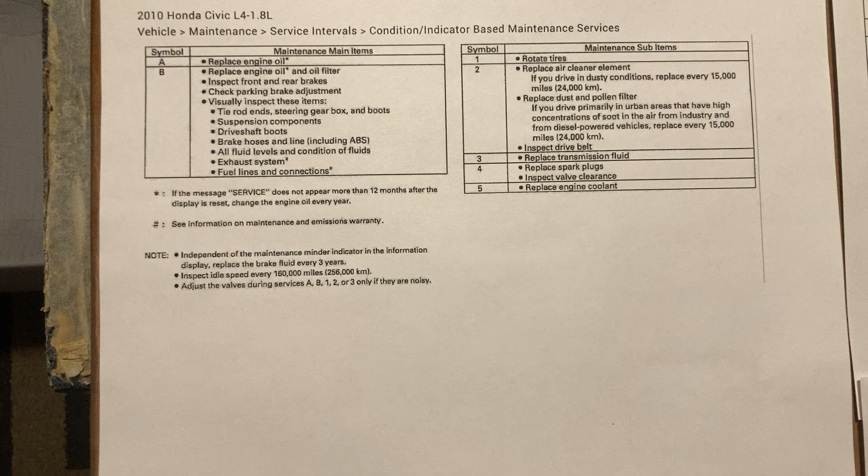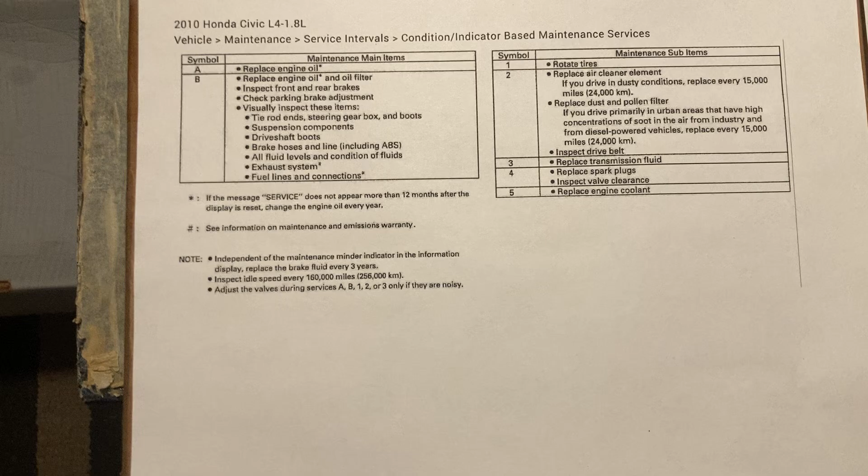So these are the codes. On this side we have A and B, and on this side we've got numbers 1 through 5. This chart works all the way up to 2015.

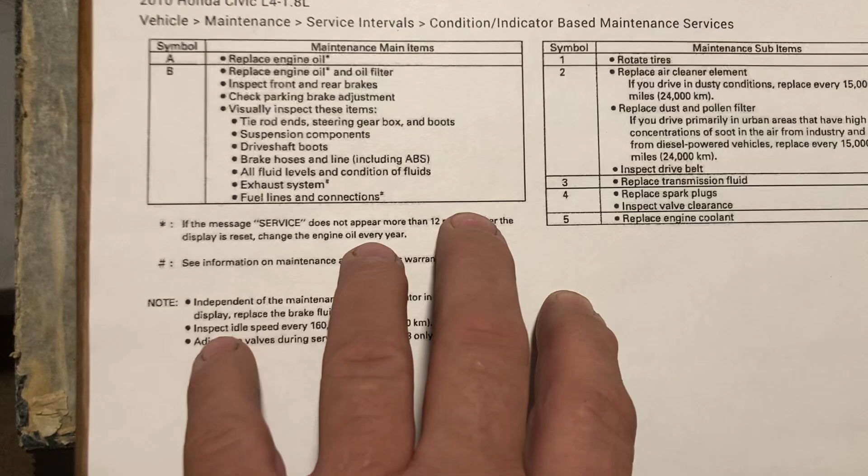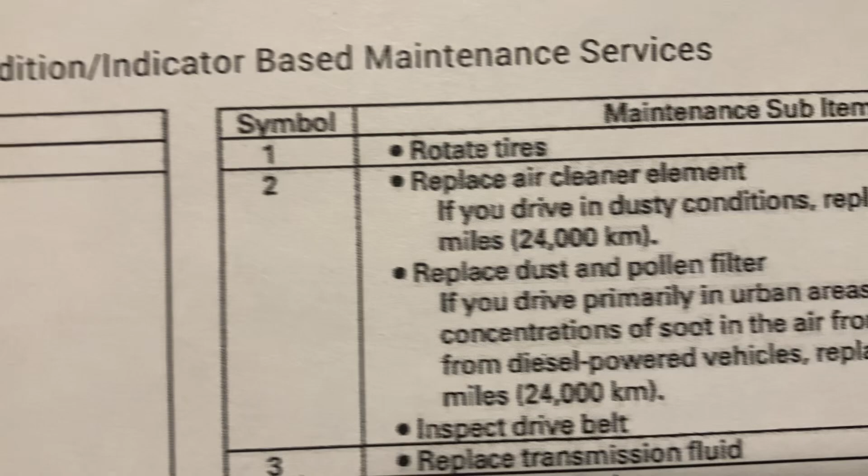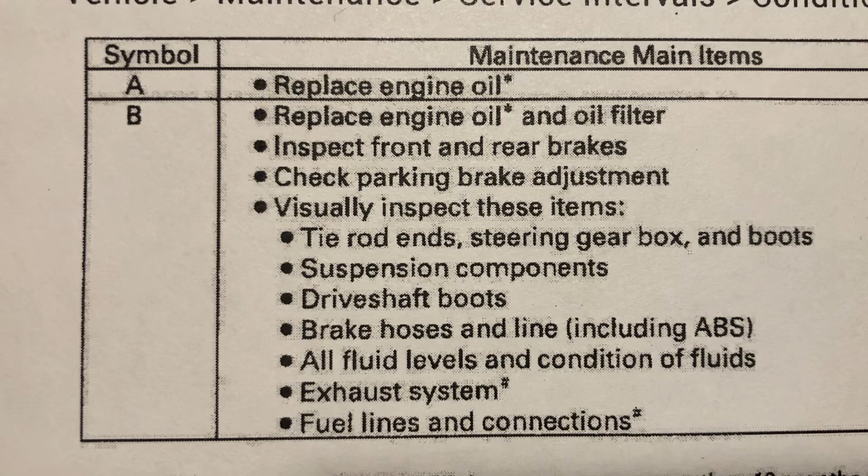So if you have an A1, it's replace engine oil and rotate the tires. If you have a B, that's replace the oil and filter, inspect the front and rear brakes, and all the other things on the chart under B.

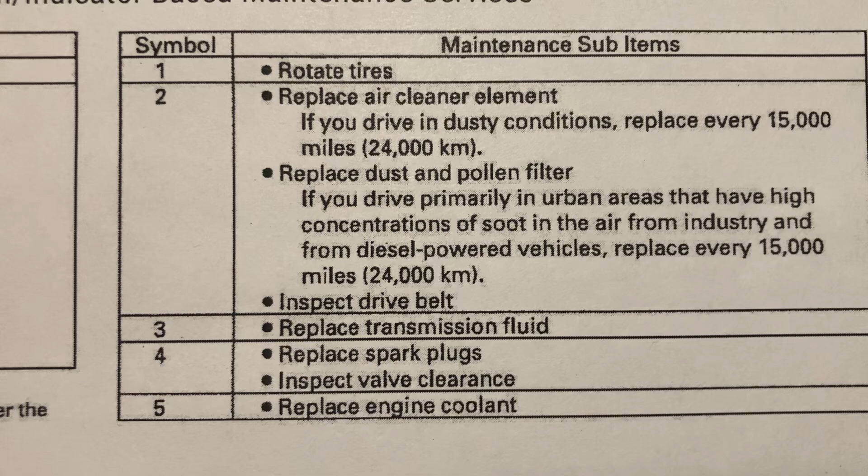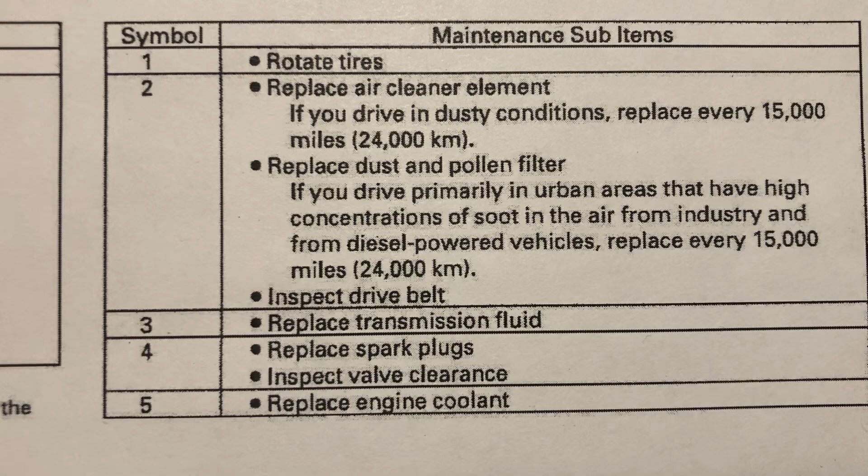1 through 5: say you have a B 1,2,3, that would be rotate the tires, replace the air filter, replace the cabin filter, and replace the transmission fluid. 4 is replace spark plugs and inspect valve clearance, and 5 is replace the engine coolant.

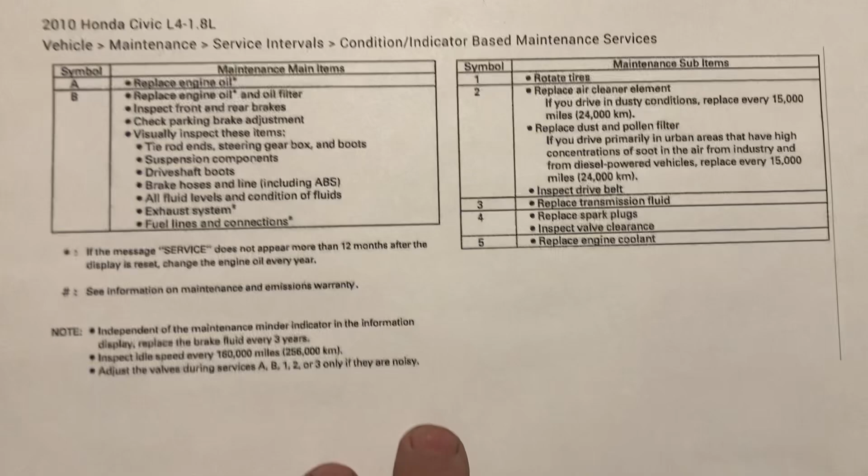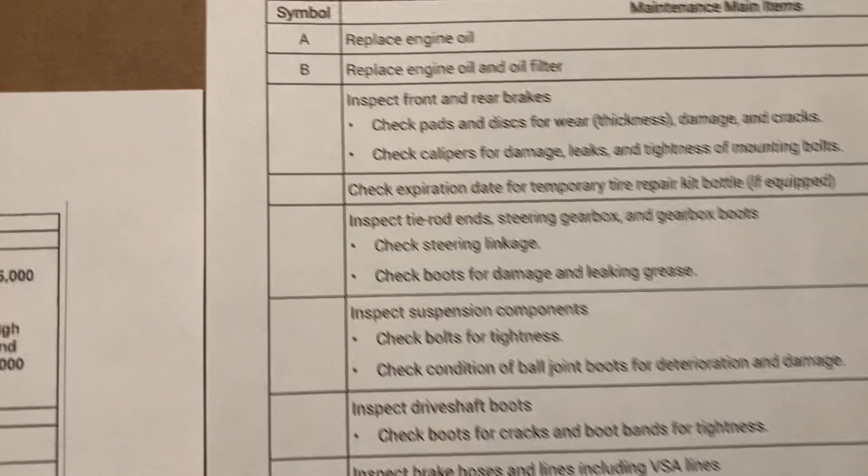So like I said, this chart works all the way up to 2015. For 2016, it's pretty much the same thing, they just went into a little more detail on some things. A is still replace engine oil.

I got a comment that if you're replacing the engine oil, I don't know why you wouldn't replace the oil filter also, so make sure you're taking care of that.

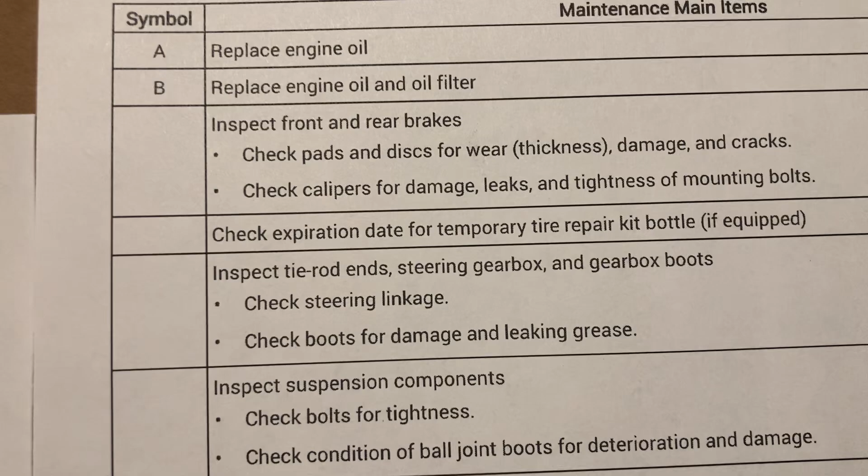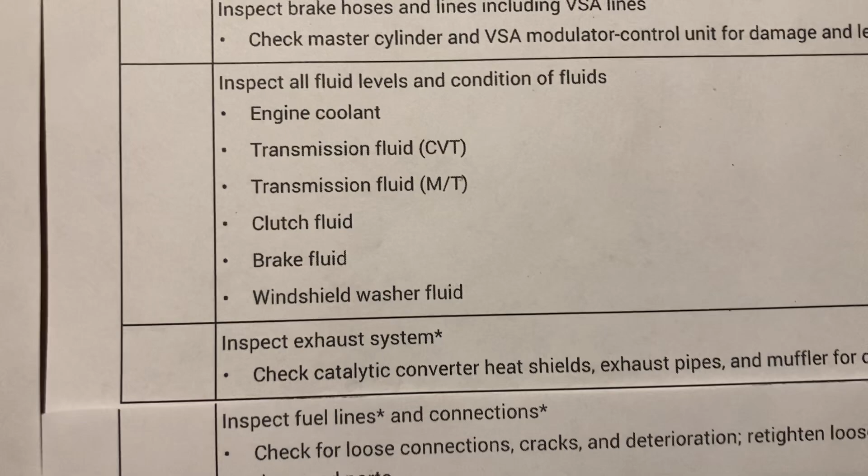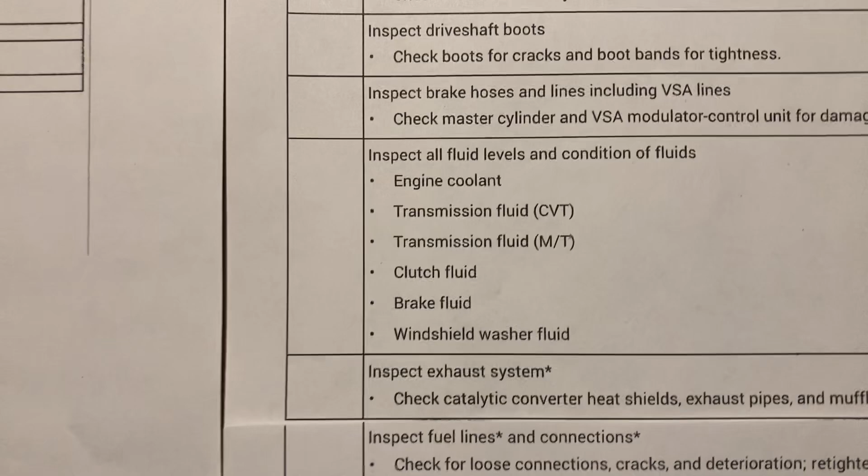But then B is going to be all these other inspections, down to inspections of the fuel lines and the connections. Now they did add this in 2016, the transmission fluid for the CVTs.

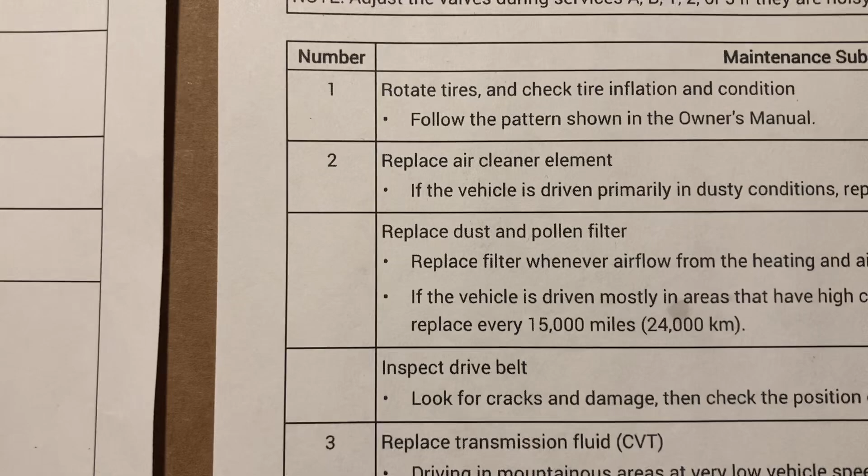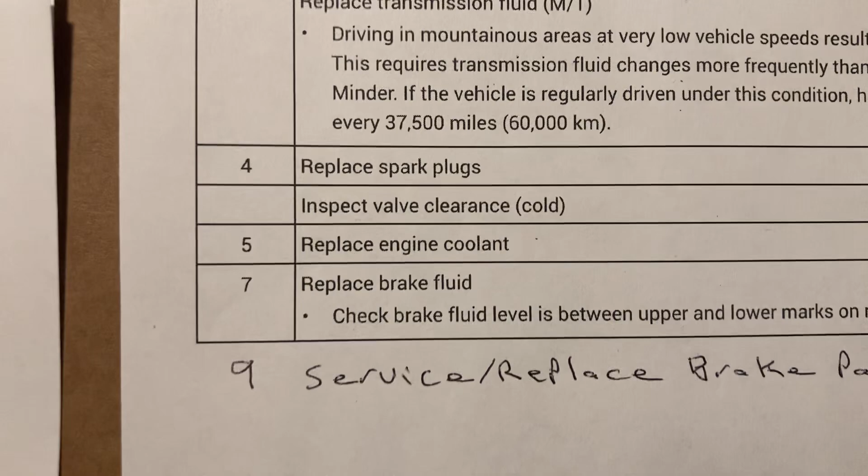Now the one thing that did change is the numbers. They're still 1 through 5 for the most part, but then they added number 7 to replace the brake fluid. For some reason on my ALLDATA subscription it didn't have a number 9, so 9 is to service and replace the brake pads and rotors.

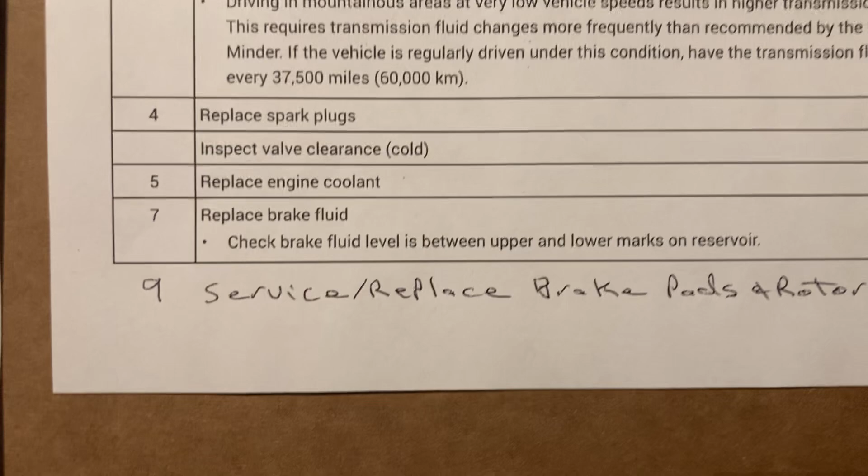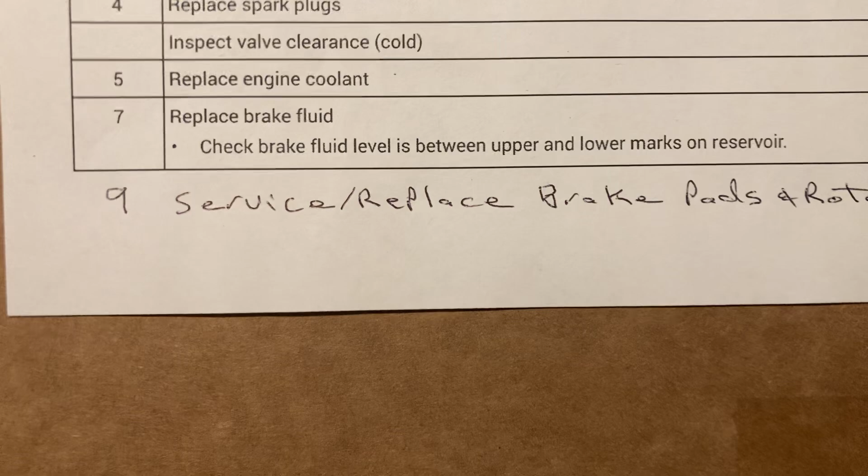Now obviously, if you get that indication and you have had your brakes serviced recently, you can pass on that because you have documentation that the service has already been done.

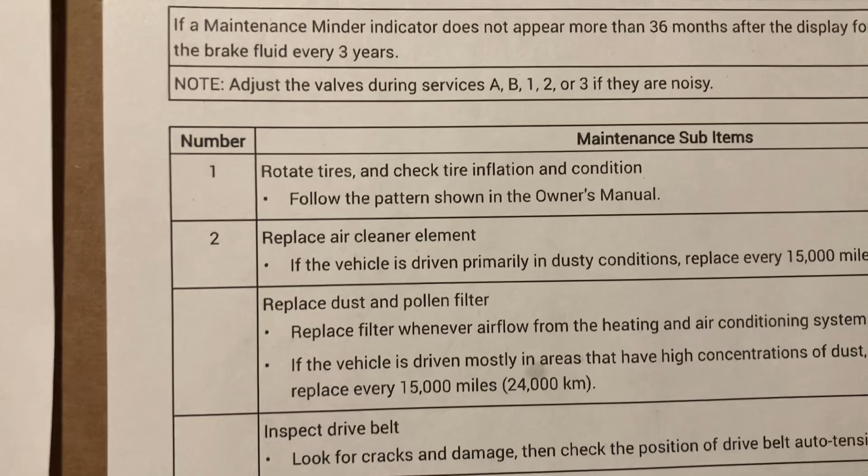On these newer cars, you want to make sure that if you are doing the work yourself, you're keeping all the receipts of what you're doing and what you're spending, because in case of any kind of defect in the car, if you go back to the dealer, you're going to have to prove that all the service has been done to get any kind of warranty work done.

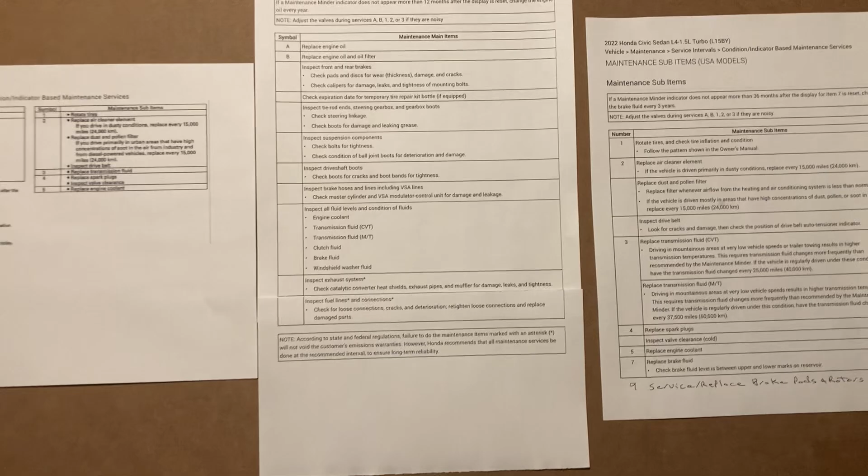So like I said, I just wanted to make a quick video on this. A lot of people have complained to me about the maintenance minder, but I kind of like it because it will tell you what you need, and in your owner's manual you will have these charts that will kind of break it down for you.

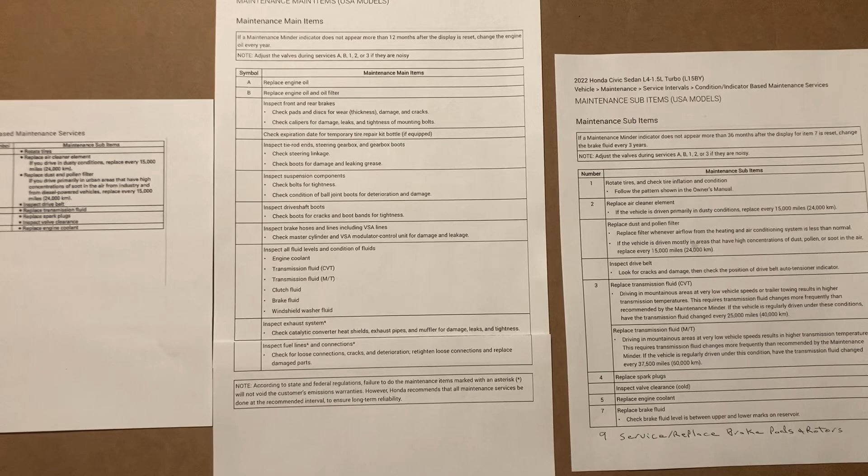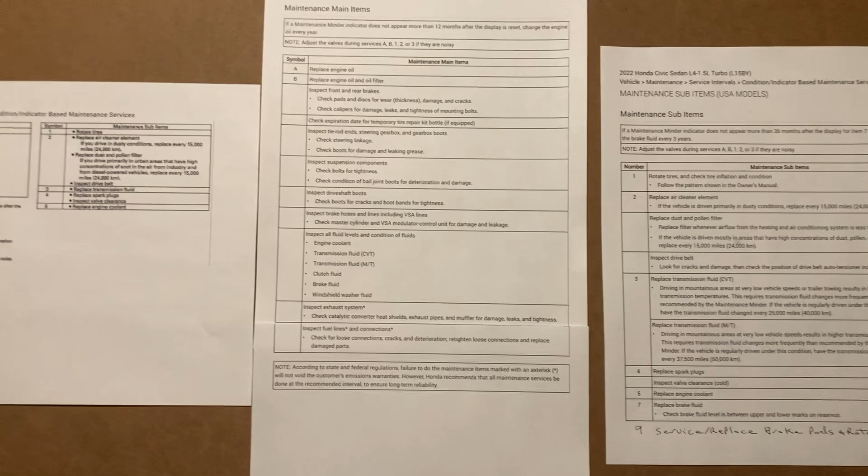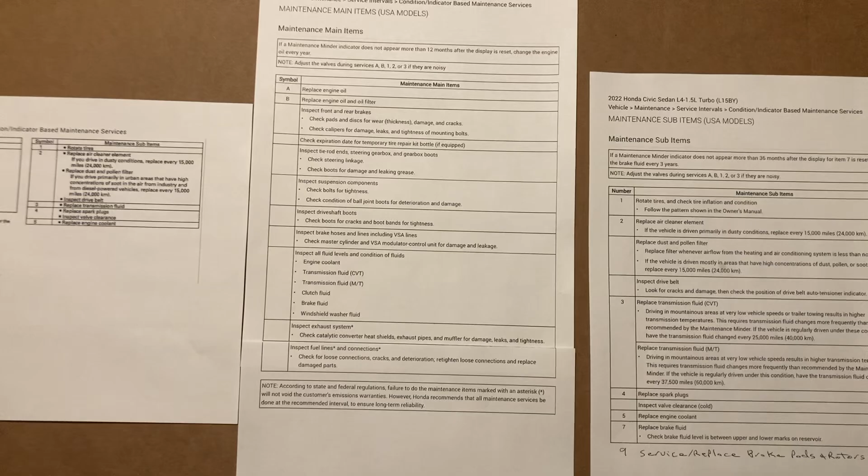Whereas with other cars, I have to go into ALLDATA and look up, say a 2010 Honda or a Toyota Corolla by a certain mileage, 110,000 miles, to see what's all required. Not everybody has access to those manuals, so this is kind of a simpler system that more customers, more car owners, will have access to.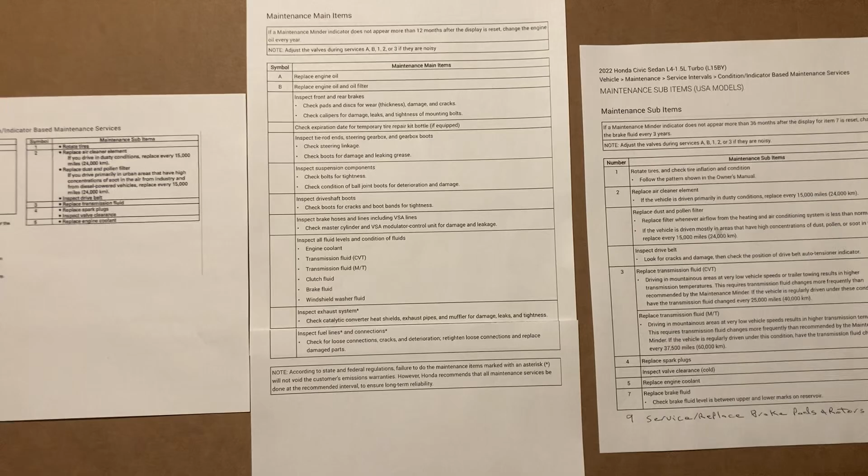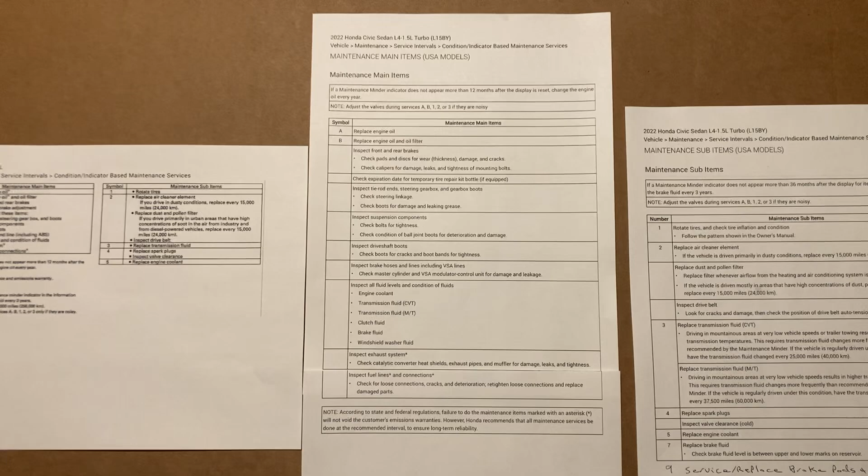So anyway, I just wanted to make this quick video, I've had a couple people ask me about it. I hope this helps you on your Hondas. Make sure you're keeping up on that maintenance, because if there are any problems, they'll find any reason to disavow any warranty if you don't have proof of your services. So make sure you're staying up on this stuff.